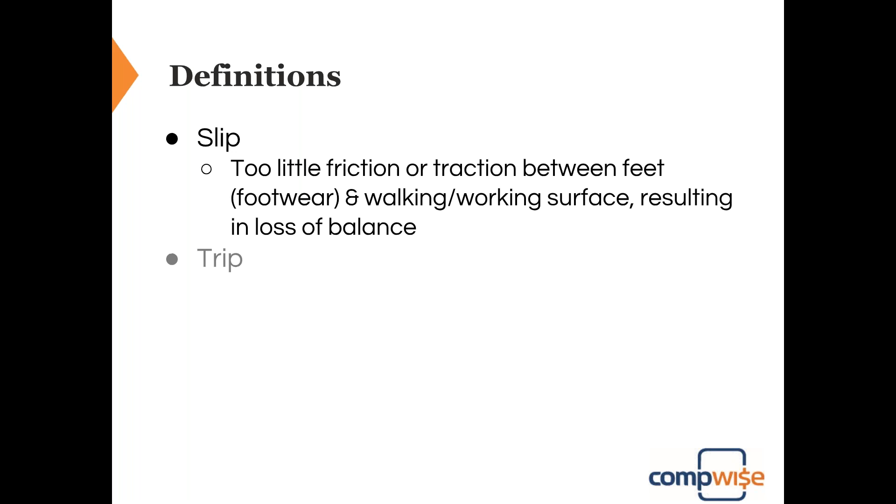I want to start off with a couple definitions. So how exactly do we define a slip? That is going to be when there's too little friction or traction between your footwear and the walking working surface that you're on, and then that results in a loss of balance, which leads to ultimately a fall, which ends up being the cause of a lot of injuries in the workplace. A trip is a little bit different. So instead of not having enough friction with a trip, you're going to hit an object or some sort of obstruction in the walkway, and then your upper body continues moving, and that ends up resulting in a loss of balance.

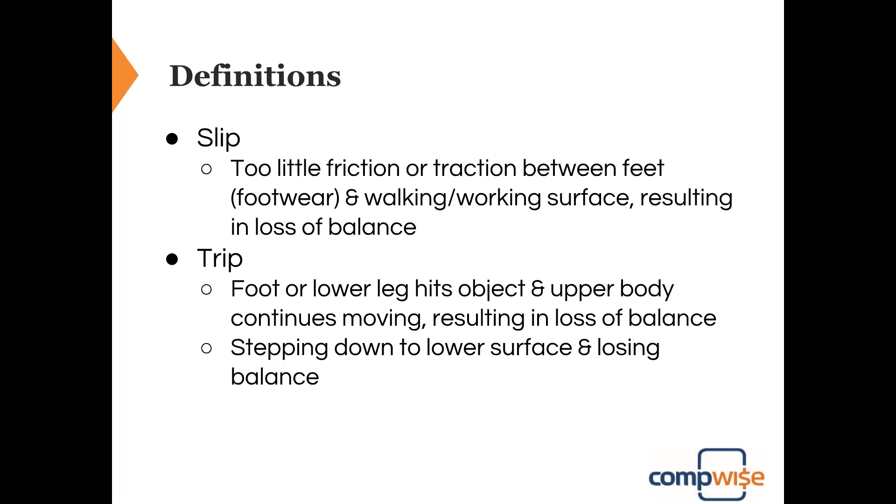All right, or you could trip by stepping down to a lower surface and losing your balance. I also want to put a little asterisk in there. You can do that actually as you're going up a surface too. As a kid, I was notorious for falling while going upstairs just because I went a little too quickly. So trips can also be falls that are while you're on a staircase as well, or stepping from a curb down to off the curb.

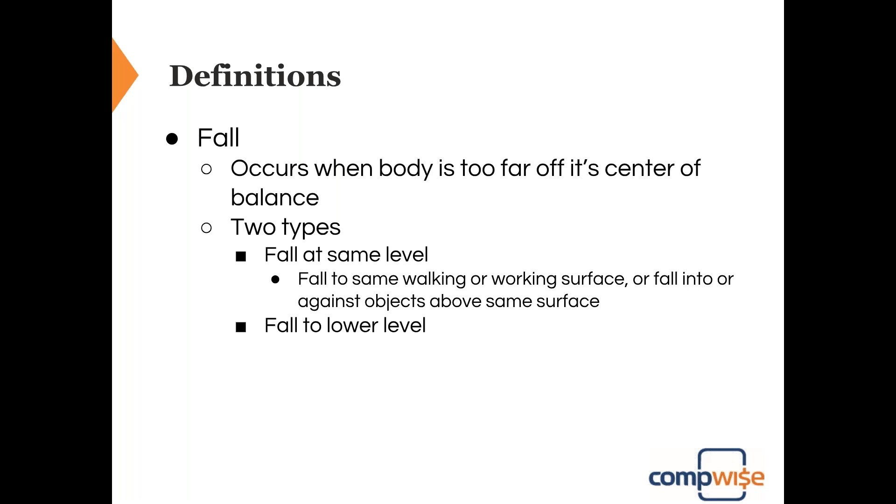Couple more definitions. The fall actually occurs when the body's too far off its center of balance, typically due to a slip or trip. And then there's 2 types of falls that we register. There are falls at the same level, which would be your slips and trips. And then there are falls to lower levels, which is when you're working on a ladder or you're up on a raised platform or a roof, and then you fall down to a lower level or working surface.

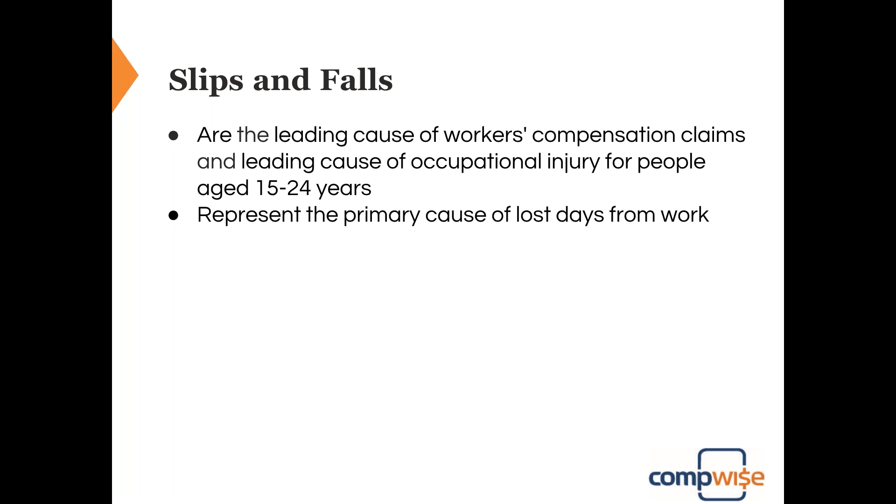Slips and falls are a leading cause of workers' compensation claims for people aged 15 to 24 years old. A lot of times these workers are less susceptible to overexertions, though they can have overexertions. But younger folks, the leading cause for occupational injury for them is slips and falls. And they are the primary cause of lost days from work as well. And that information is from the National Floor Safety Institute.

Slips, trips, and falls accounted for 26% of the total occupational injuries and illnesses in the United States in 2016. That was the last large survey that they put out data for so far, and makes them one of the leading causes of occupational injuries and illnesses in the entire country.

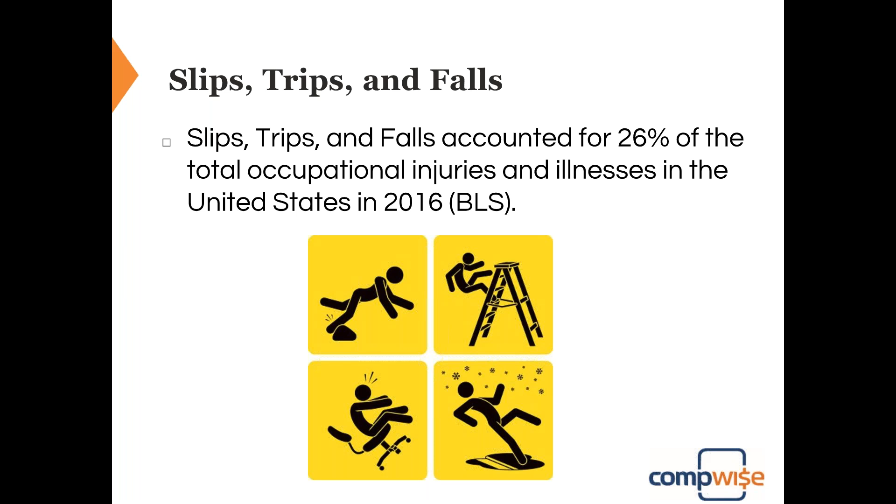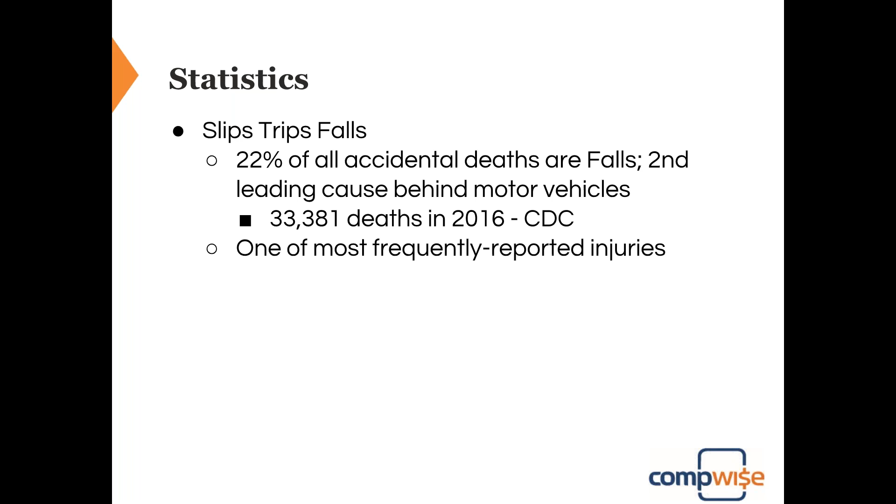Slips, trips, and falls are linked to 22% of all accidental deaths, which is the second leading cause behind motor vehicles, and that is both in and outside of the workplace. These numbers come from the CDC. In 2016, there were 33,381 deaths due to falls. And they're one of the most frequently reported injuries and make up about 25% of total reported claims per year in the country, and over 17% of all disabling injuries are a result of falls.

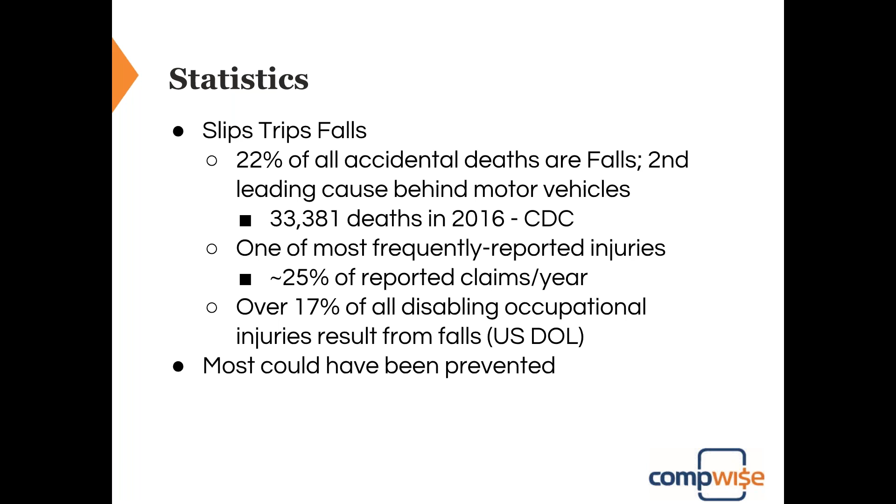And with falls and slips and trips, they are completely preventable in most cases. And later on in this presentation, we're going to talk about that prevention. As far as just in the workplace in 2016, 849 fatalities, which was 17% of all those fatalities. 229,000 cases with days away from work. So imagine the amount of money spent in lost time payments just due to slips, trips, and falls.

33% of slip fall incidents resulted in more than 31 days away from work, which is why we see such high claim values with falls. And then just in Washington, just looking at our group programs here in Washington, I pulled some of the numbers for those. And retail wholesale services, this is a 2-year period for you guys. So from October of 2016 to July of 2018, we saw 636 claims just in that Association of Washington Business, Retail, and Wholesale Services retro group.

That made up 31% of the total claims and incurred costs of over $12 million with an average cost of $20,000 per claim and almost 12,000 time lost days. That's just in a 2-year period, and that is just in the retail wholesale services group that AWB runs in Washington. Hospitality group, I know we have some folks from every group in this webinar. Hospitality group, I have a 4-year period available for you because you were one of the first groups that we started working with up here.

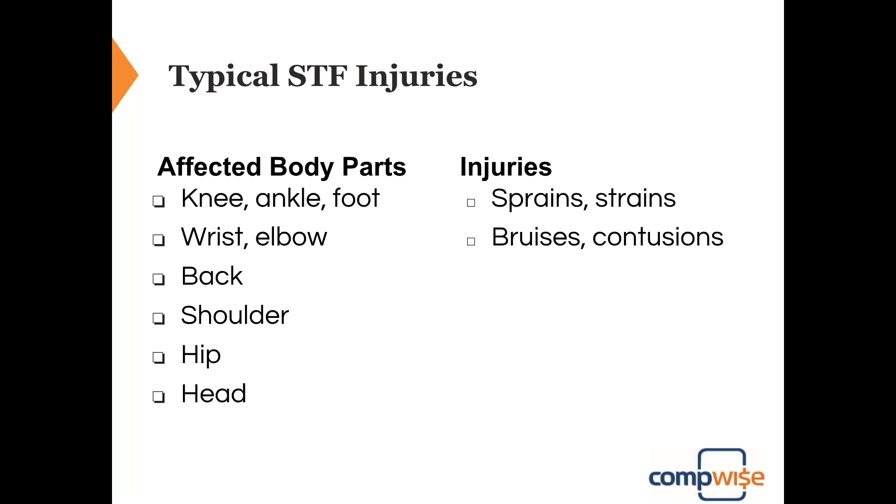The typical injuries we end up seeing then are sprains and strains, bruises and contusions in a best case scenario. Fractures are extremely common, especially in the arm. Abrasions and cuts, concussions and head trauma, which of course are going to be your most serious incidents. And then with back injuries, they're typically sprains and strains, though you can also see some skeletal injuries in a fall as well with the back.

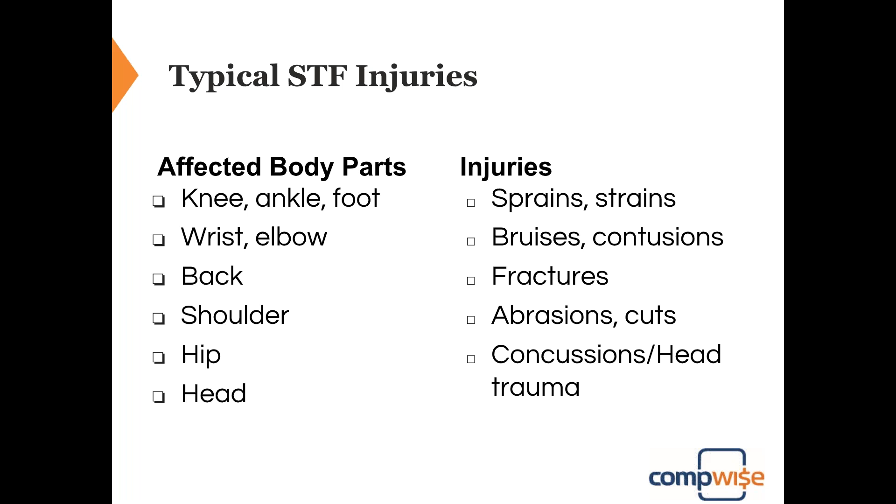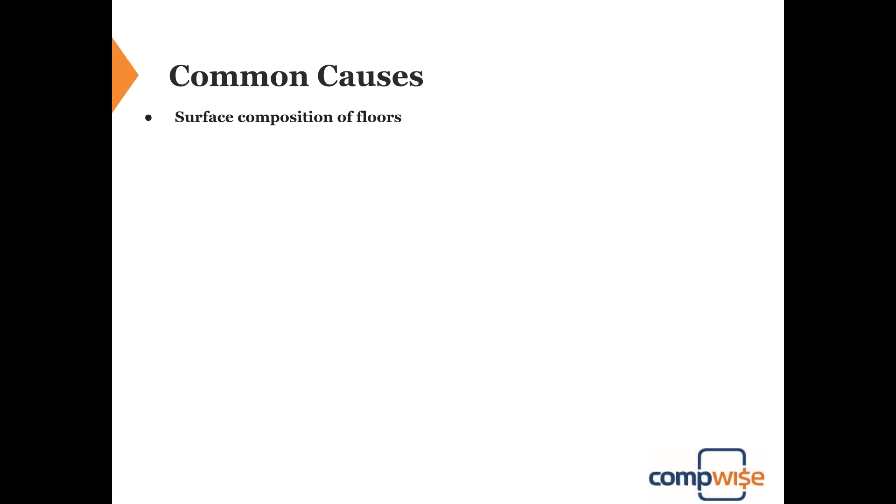The common causes of these slips and trips: the surface composition of the floor. So do you have a really smooth floor? Do you have wet, oily surfaces on that floor? Or is your floor typically dry and have a rough surface that provides good traction? So how much slip resistance does the floor have when it's dry and properly cleaned?

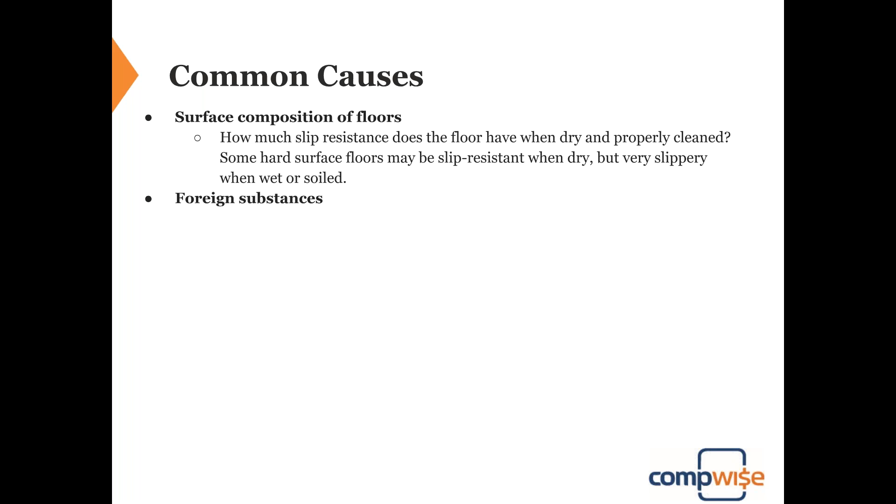Also some hard floor surfaces may be slip resistant when dry, but the moment you get it wet, it becomes extremely slippery. Some floor surfaces also get very slippery just when they get dust on them. So keep that in mind, the composition of your floors and the areas that you're working in. Any foreign substances, so ice, grease, and water, are major contributors to hazardous floors, and conventional mopping with the dirty mop water just makes the problem worse.

So consider some sort of no-touch cleaning system or a mop bucket that has separate compartments for clean and dirty water, because a lot of times the dirty water, especially if you're cleaning up a greasy area, once you start mixing that together with the grease and spreading it around, just makes things worse. So if you have a mop bucket that separates the dirty water from the clean water, that usually helps reduce things as well, especially those of you in the fast food industry working with those greasy floors a lot.

Surface conditions: do you have any raised or recessed edges, loose carpeting, mats that are rolled over in front of your entryways at the doors? Soiling and overall cleanliness of the floor can all be factors that increase slips. And then surface changes. For example, walking from a carpeted floor to a tile floor can cause someone to trip as well, especially if they can't really see the change. Or if you have a change in the level of your surface where you're stepping down onto another surface.

There are a lot of restaurants I've been to where you go into the restroom and you have to step up to get into the restroom. And then on the way back out, you're going into kind of a poorly lit area. There's a step down and you forget about it and you don't see it. It's not very apparent. And you step down and end up tripping or falling forwards into the wall in front of you. All right.

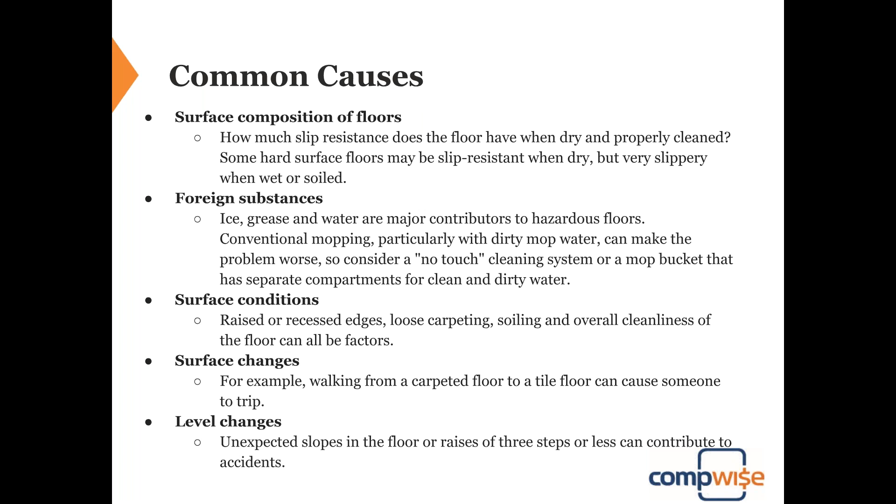Some more common causes: obstructions, especially extension cords and hoses, or even wet floor signs can make for an unsafe obstacle course. You've got to realize, especially if you have customers that come into your workplace, putting up a wet floor sign nowadays actually creates an additional hazard compared to just making sure that floor is dried right away.

How many times do you see people walking around not even looking up because their face is in their cell phone? This should not be a problem with employees because they shouldn't be on their phones, especially when they're walking around. But you can't really police that with customers. They'll walk in with their face in their phone and walk right into a wet floor sign, and that'll cause them to trip. And next thing you know, you have a civil suit on your hands.

I am guilty of this. I remember when I was a sophomore in college, walking down Prospect Street in Morgantown, West Virginia, playing Words with Friends on my phone. I ran face first into a telephone pole. Ever since then, I keep my phone in my pocket when I'm walking around, and if I need to use my phone, I stop and use it, because I did that in front of a couple people and was embarrassed for quite a while.

So again, watch out for creating additional hazards by putting wet floor signs down. Extension cords: if you're running extension cords, especially for more than just a really short time period, you should be taping those down or putting something over top of them to make them less of a trip hazard.

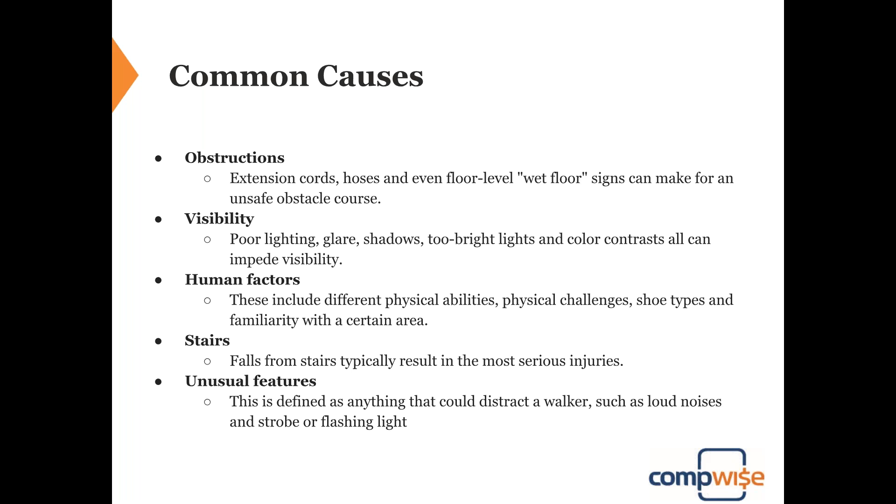Unusual features, anything that could distract a walker, such as loud noises, strobe lights, or flashing lights, could also cause a slip, trip, and fall. These are less common, and I see these more in construction sites than anywhere. You have a strobe from a piece of equipment that's going by that has someone rubbernecking, turning their head to look that direction and not looking at where they're walking. But typically that's on the lower end of common causes.

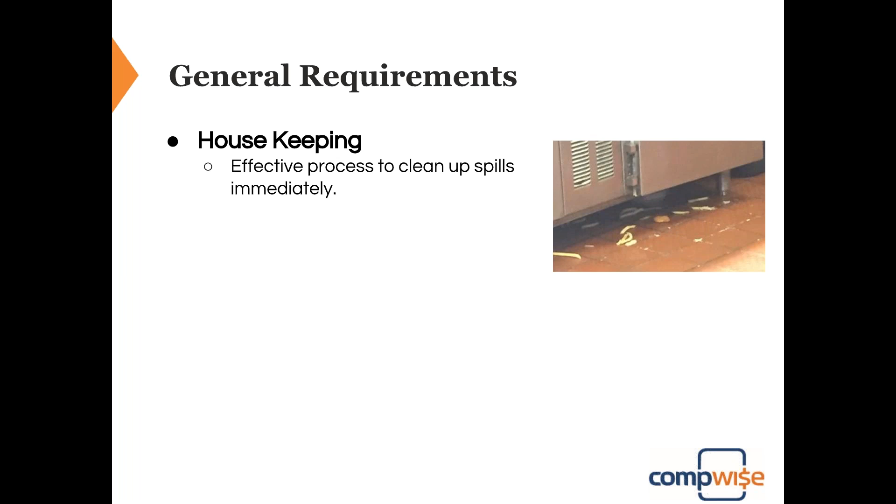Some general regulatory requirements for housekeeping. You need to have an effective process to clean up spills immediately that's relevant to your workplace, and an effective process to mitigate leaks or other causes of slippery floors or walkways.

I was actually just at the Phoenix airport yesterday, and after I landed, when I was walking through the terminal, it was raining out, which is rare in Phoenix, so they must not have known that their roof was not done very well on this brand new terminal. They had a huge leak coming in, and they pushed garbage cans and giant totes for moving garbage around under these leaks, and they were actually filling up and overflowing, because when it does rain in Phoenix, it rains hard. It was all over the carpeting, it was spilling out onto the tiled area, and they just could not keep up with it. So make sure you have an effective process to mitigate those leaks or other causes of slippery floors or walkways.

Construction areas, aisles, stairs, ramps, runways, corridors, offices, shops, and storage areas where work is in progress do need to be well lit. That is actually the exact wording from the WAC standard that housekeeping is located in. So make sure your lighting's good. That tends to be more of a problem in restaurants and construction sites than it does in most other general industry settings. Make sure the floor is free of debris.

You see this picture I have up here. That is a picture from obviously a fast food restaurant, one that I actually used to work at. And this is a common occurrence. You get into the busy part of the day, you start dropping some products on the floor and they get left there.

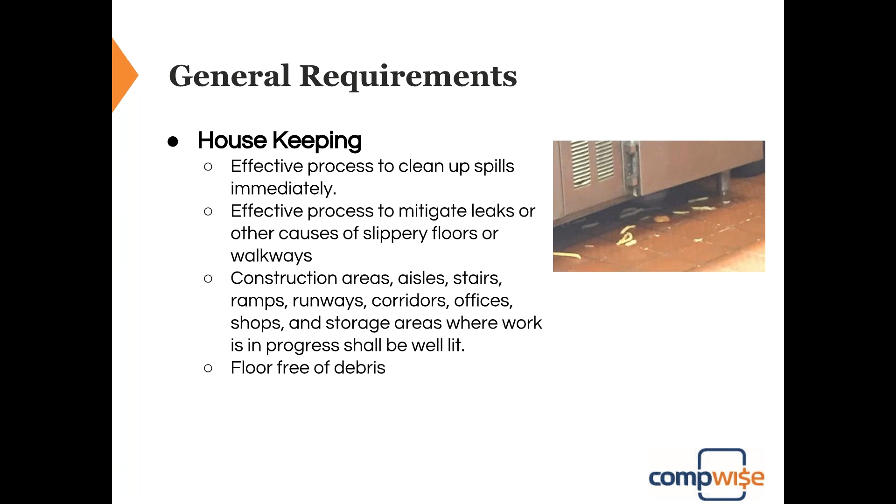It's always good to have one person that's assigned to be cleaning that stuff up as it happens, and staying ahead of it, because there is nothing more slippery than a French fry on one of those floors once you step on it and the grease comes out of it and gets on the floor. Even if you have a slip-resistant shoe, that French fry is going to wipe you out.

Aisles, passageways, and travel lanes. Make sure you keep a clear area and move any obstructions that could create a hazard. This is a perfect example of an extension cord that's in the way and could create a trip hazard. Make sure that in general industry settings you're marking permanent aisles and passageways that are made for pedestrians to move around, especially those of you in warehouses and really industrial settings.

Your aisles need to be wide enough so that any mechanical handling equipment that you're using can pass through it. Otherwise, if you have pallet jacks and things like that that are used to move heavy objects, and you have an area that's not wide enough for those to get into, employees can't use it, and then they're going to end up going in there, tripping over things, and you're going to have your overexertion injuries because they're not able to get in there with the mechanical handling equipment, so they're going to try to lift it on their own.

When you try to lift something that's too heavy, it could throw you off balance. You could fall. If you're getting it off a shelf, it could fall onto you, as well as, like I said, the overexertion injuries that could come along with that.

Making sure that you maintain 3 points of contact is also very important anytime you're climbing onto equipment or climbing a ladder. That 3 points of contact, I can't tell you how many times people will know that they need to have 3 points of contact, but it's such a mental task to actually do that when you're climbing a ladder. Next time you're on a ladder, try and catch yourself.

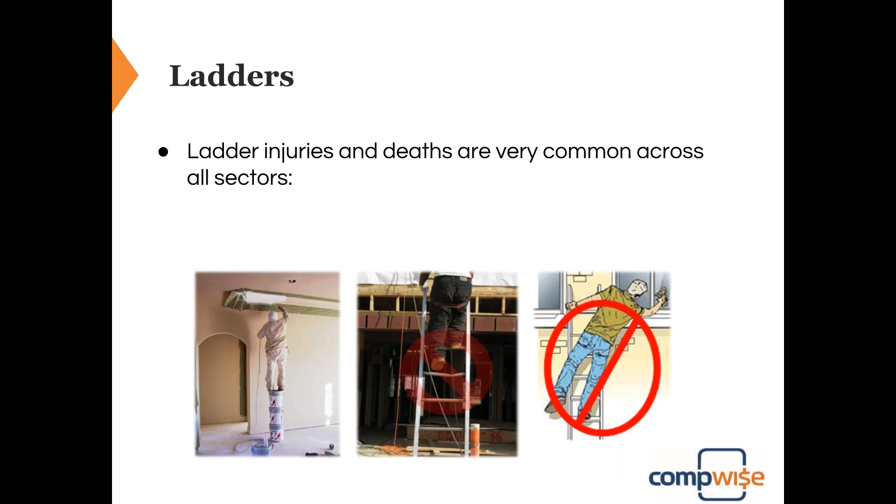There we go. So while you're on ladders, ladder injuries and deaths are very common across all sectors, and most of the time the incident is due to user error, not a defective ladder. Most employers are very good at making sure they take out defective ladders, which is great, and that is one reason that human error is a more common cause of those injuries than defective ladders are. This first picture on the left side of your screen here, make sure you're using a ladder whenever a ladder is needed.

I'm actually kind of impressed that that guy was able to get up on top of 3 buckets, but you should definitely not be doing that. It'd be really easy to lose your balance and fall off of that. The second image there, you can see a defective ladder rung, which, like I said, is not a common cause of injuries, because most of the time those ladders are taken out of service the moment they're damaged.

And then the last photo there, that is a perfect example of how people end up losing their balance and falling off the ladder. Even if he still had both feet on that ladder, with his chest outside of the rails, he's already off balance and could easily fall off that ladder.

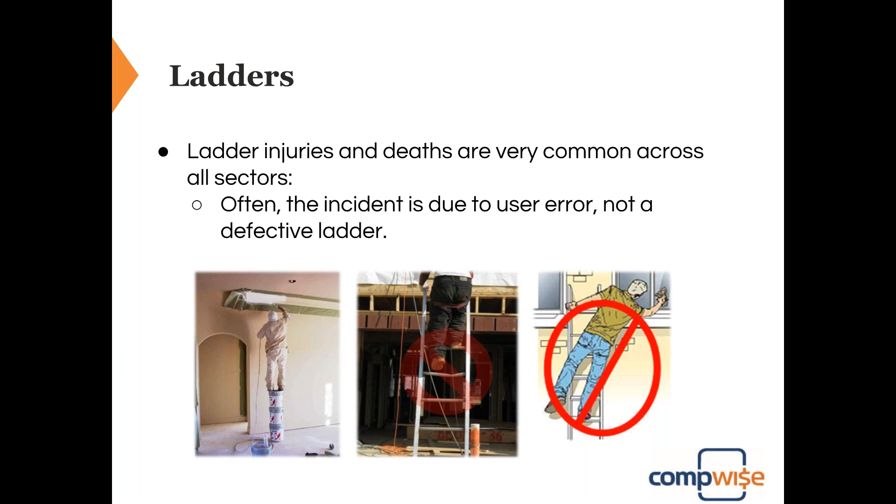Work platforms are always much safer than ladders. When you're able to use a work platform instead of a ladder, please do it. Ladders should really be a last resort. They're one of the most dangerous tools that people have on a job site, and a lot of people just don't give ladders the respect that they need because of the hazard that they pose.

Users on a ladder need to be trained how to properly use a ladder. This is a huge shortcoming in the retail industry, especially. A lot of times in the retail industry, we see folks that are going out to hang up seasonal decorations in a department store or something like that. And when they're hanging up those decorations or signs or even changing a light bulb, a lot of times it's a young employee who has not been trained to actually use the ladder. It's just assumed that they know how to use a ladder.

Never, ever assume or even believe someone when you ask them if they know how to use a ladder. Because if they tell you yes, it probably just means they know how to open it up. It doesn't mean that they know to use 3 points of contact to keep their chest between the rails and everything else that I've talked about so far.

Also, they should have someone holding the bottom of that ladder in the retail industry to make sure they're not falling, because when you fall in the retail industry, you're not even falling onto the floor most of the time. A lot of times you're falling onto a shelf full of products and then to the floor, which could pose even more of a hazard.

There is a great video if you want to use it for training purposes for this. It's made by either Prevent It Canada or WorkSafe BC, one of the two. But it's open source, available on YouTube. It's designed specifically for the retail industry, but I use it when I teach fall protection classes in every industry.

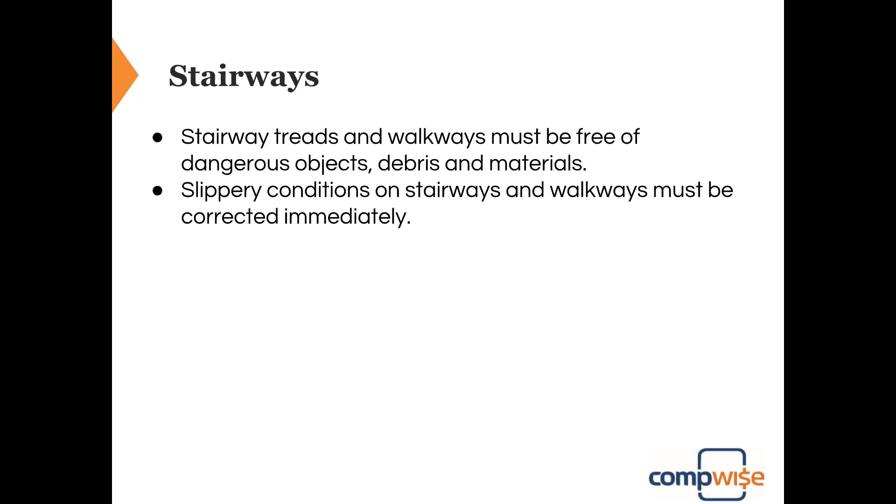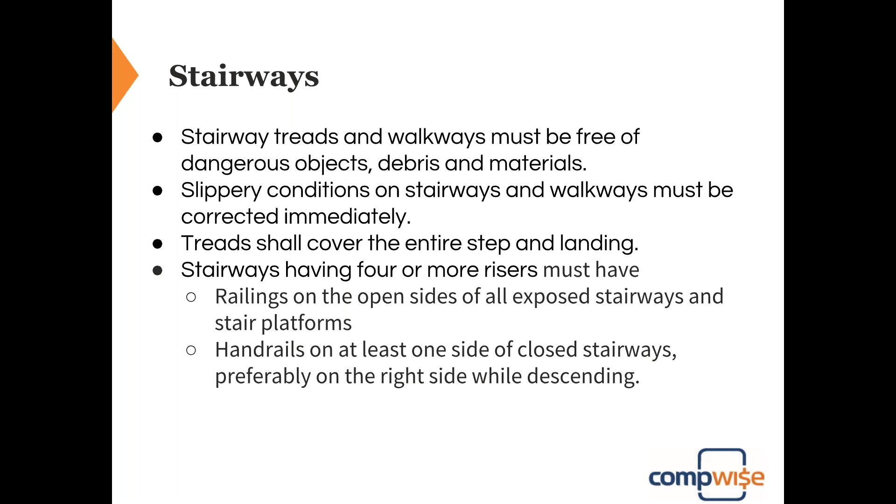Treads need to cover the entire step and landing. Again, these are right from the Washington codes for stairways. Stairways having 4 or more risers need to have railings on the open sides of all exposed stairways and stair platforms, and handrails on at least one side of closed stairways. Preferably, those should be on the right side of the body when you're descending. And it's never a bad idea to have a handrail on both sides either.

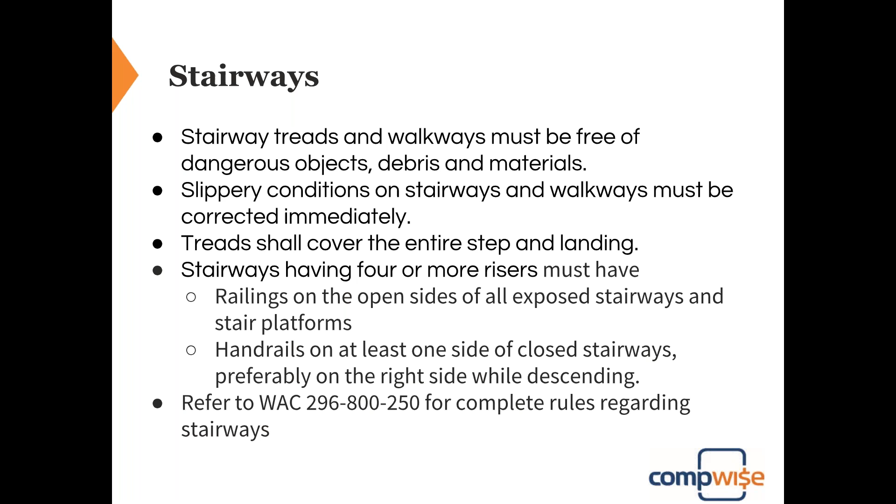If you want more information on the requirements for stairways, those are in WAC code 296-800-250. If you just Google WAC and then those numbers, it'll pop right up in a Google search. Also, those are all located on L&I's website.

Fall protection. Fall protection I teach globally at a high level. Each year, falls consistently make the top 3 causes for workplace fatalities. A number of factors are often involved in falls, including unstable work surfaces, misuse or failure to use fall protection equipment, and human error. And almost every time there is human error involved.

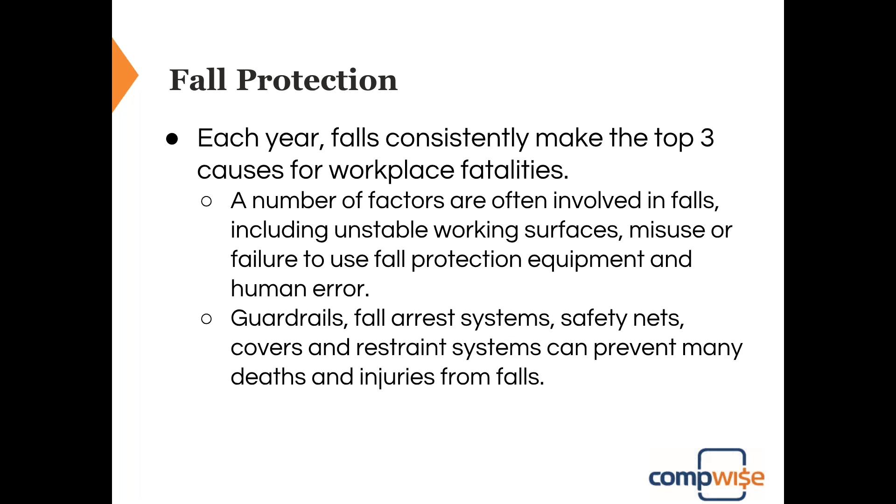Guardrails, fall arrest systems, safety nets, hole covers, and restraint systems are all things that can prevent many of these deaths and injuries from falls. Consider using aerial lifts or elevated work platforms to provide a safer elevated working surface. Also, commonly named a Baker scaffold or a rolling platform that has casters that lock on it. Those are highly preferable to using a ladder, especially ones that have guardrails on them if you're using the rolling scaffold.

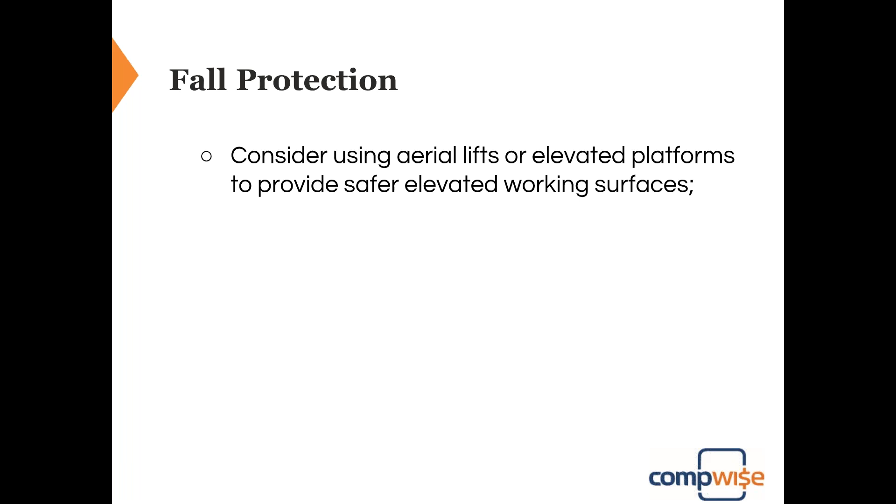Make sure that any guardrail systems you're erecting, that you put toe boards on it. Anytime you have warning lines on a roof or restraint line systems near the edges of floors and roofs. With the warning line systems, those can only be used by general industry if you're doing temporary work on a roof. And how far those warning lines have to be from the edge depends on the type of work you're doing. If you're doing an actual roof repair, they need to only be 6 feet away, but anything else in general industry, say you're going up to do maintenance on an AC unit, those warning lines then have to be at least 15 feet away from the edge.

A warning line, for those of you that aren't familiar with it, is not a standard guardrail. So a guardrail has to hold 200 pounds in the outward and downward direction and needs to be 42 inches plus or minus 3 off the ground, as well as having a mid-rail. With the warning lines, those are typically just a flagged set of rope that's just there to warn folks of an edge hazard and won't actually stop them from going through it.

If you need more information on that, feel free to send me an email and I can get you more information on warning line systems. Again, those are only for maintenance type work, and you have to be a good distance away from the edge to use warning lines.

Make sure any floor holes you have are covered. One of the biggest oversights on this is if you have any skylights on your roof and you're going to have anyone working on the roof, whether that's a maintenance worker going up to do work on an AC unit, or you have roofers up there replacing your roof, every single one of those skylights needs to be either guardrailed, protected with a cage over top that people can't fall through, or otherwise covered up with something that can't be fallen through when someone's working up there.

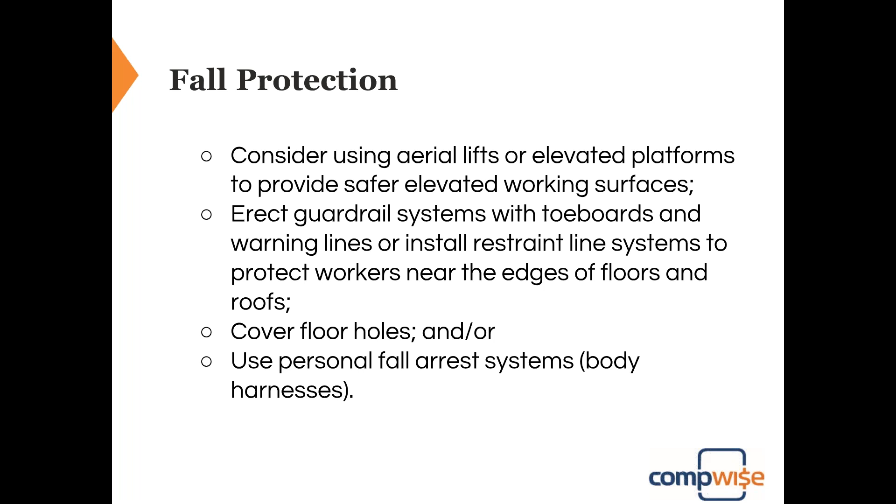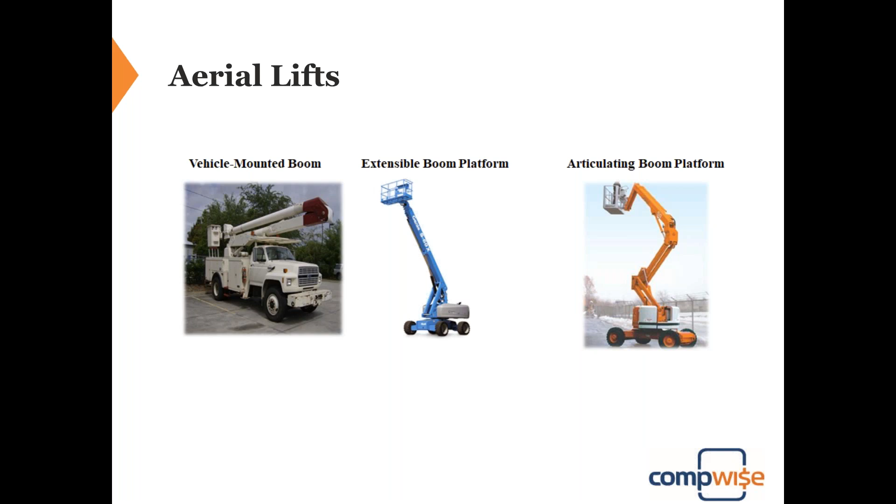Speaking of scissor lifts and boom lifts, aerial lifts have some unique requirements. When I say aerial lift, I'm talking about extensible booms, articulating booms, and vehicle mounted booms. I am not talking about scissor lifts right now in this next slide. Aerial lifts do require fall protection.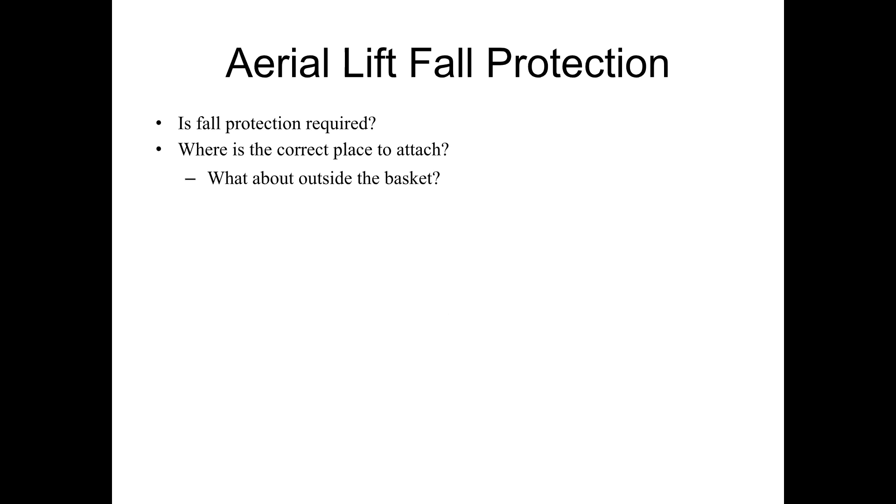Basket guardrails, you cannot tie off to a guardrail. The reason is those guardrails are only designed to hold 200 pounds, and they're not designed to hold 5,000 pounds, which is what OSHA and WISHA require for you to tie off to, a 5,000 pound anchorage point.

Connector options hierarchy: this is where I mentioned that regular lanyards do not work in most situations, because you need at least 18 feet of clearance from your anchorage point with a regular lanyard. Your best option is a PFL. PFLs, also known as personal fall limiters, are small devices that act like a seat belt. When you start to fall, they lock off just like a seat belt would, and they also have an energy absorber inside so that if you build up too much force, it will reduce it to a level that your body can handle without being significantly injured.

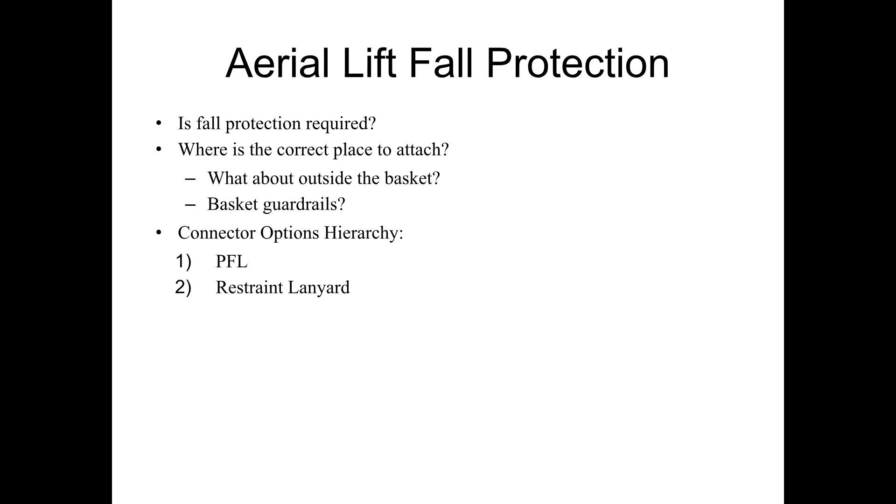Your second best option is a restraint lanyard. Again, with these boom lifts, you are at risk of being catapulted out. So a regular lanyard, which is kind of the last resort for use in these: with a regular lanyard, you are going to start to fly up into the air. It will start to partially deploy on the way up. You're going to go over the guardrails and come back down on the outside. And when that's fully deployed, you're going to have 6 feet of the original lanyard length plus 4 feet of shock absorber, which brings you to 10 feet, plus approximately 6 feet for the worker's height, which brings you to 16 feet of distance.

In most aerial lifts, when you fall out of them, it's when you are driving them and you hit a bump and it catapults you out. So usually you have that at a low level while you're moving as well. And so when you get catapulted out, you're going to be touching the ground at this point. And if you're not touching the ground with that energy absorbing lanyard with that much distance deployed, when you come back down on the downswing, you're going to swing back and be almost at head level with the bottom of that lift platform, which could result in head injuries or, more commonly, internal decapitation, where it will break your neck. And we do see fatalities due to that.

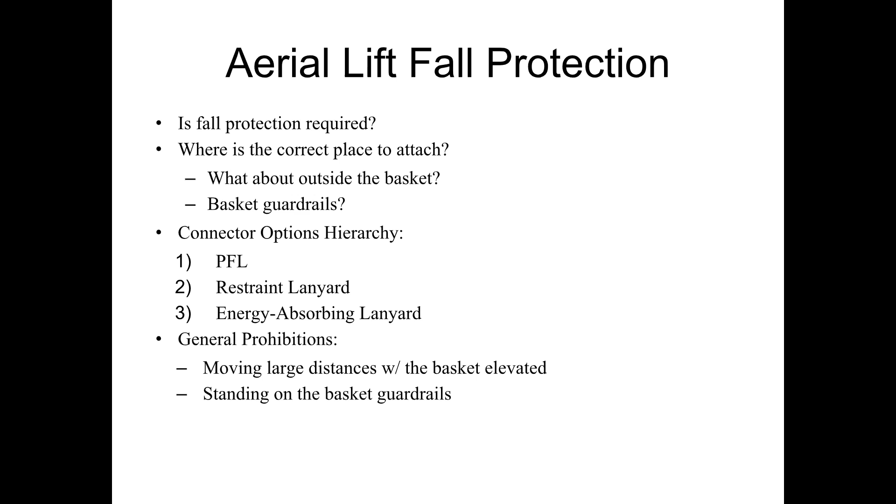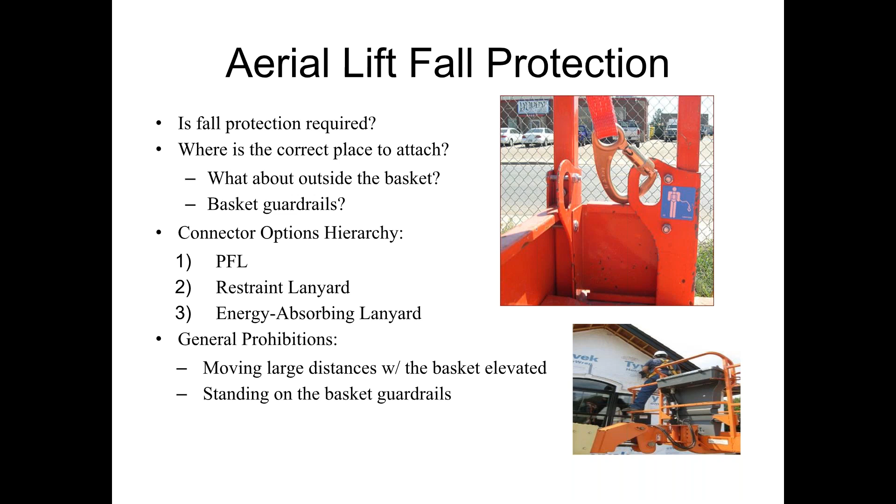When you're using a PFL, on the next slide, I'll explain the benefits of that and go through the math with you. General prohibitions: you never move large distances with the basket elevated, and you never stand on the guardrails of these baskets like you see in this second picture here. You see someone standing on the guardrails. That first picture is the designated manufacturer's attachment point on that particular lift, which the manufacturer rates for at least 3,600 pounds, since it's designed by an engineer. If engineers don't design an anchorage point, then it has to hold at least 5,000 pounds. And that's just to add an additional safety factor since you're eyeballing it as a competent person.

Okay. The mistakes people make in an aerial lift: I mentioned a typical lanyard requires 18+ feet of fall clearance. With a PFL, a personal fall limiter, they're round devices that essentially act like a seat belt. A Class A PFL is going to lock off and fully deploy in under 24 inches, and then we add a 2-foot safety factor to that. So you're going to have a total fall distance of essentially 4 feet. A Class B SRL is going to lock off fully in 54 inches, and then we add a 2-foot safety factor to that, so it comes to a total of 6.5 feet of fall distance with that one, which is much less than the 16 feet plus 2 feet needed for a traditional lanyard.

Okay. I'm going to just take a moment here to see if there were any questions before I keep going. So, looks like we don't have any questions in the question box, so that's good. All right, so I'm going to keep going here.

With scissor lifts, is fall protection required in a scissor lift? You should have access to the chat box down in the bottom right. I want to know what you think. Is fall protection required by OSHA, WISHA, or L&I in a scissor lift? If anyone's brave enough to go ahead in there... All right, looks like nobody wants to take a stab at this one in the chat box.

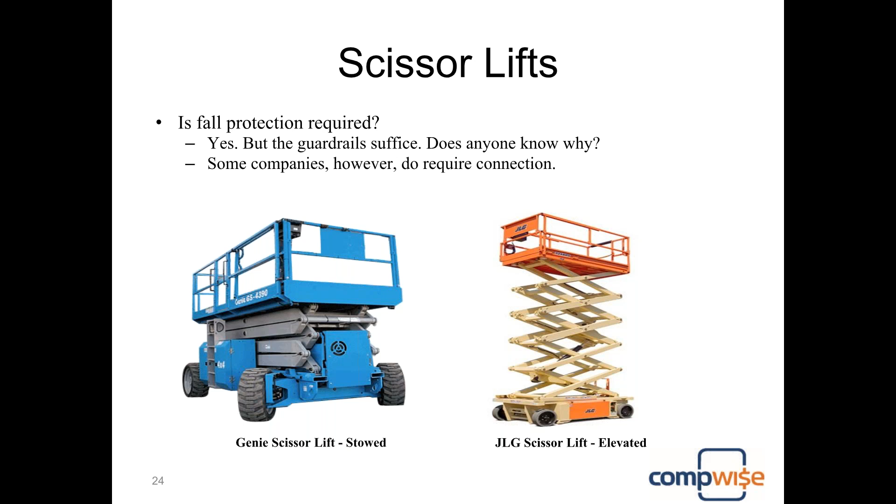And that is because most of the fatalities involving scissor lifts are falls due to human error, where the worker will lean outside or lean their chest over the guardrails or stand on the guardrails and they end up falling out. If they had a PFL or a lanyard on, it would have prevented that fatality or that injury. So I recommend that you have a company policy that requires fall arrest even on a scissor lift. Okay, and there's images for a scissor lift for those of you that may not be familiar with those.

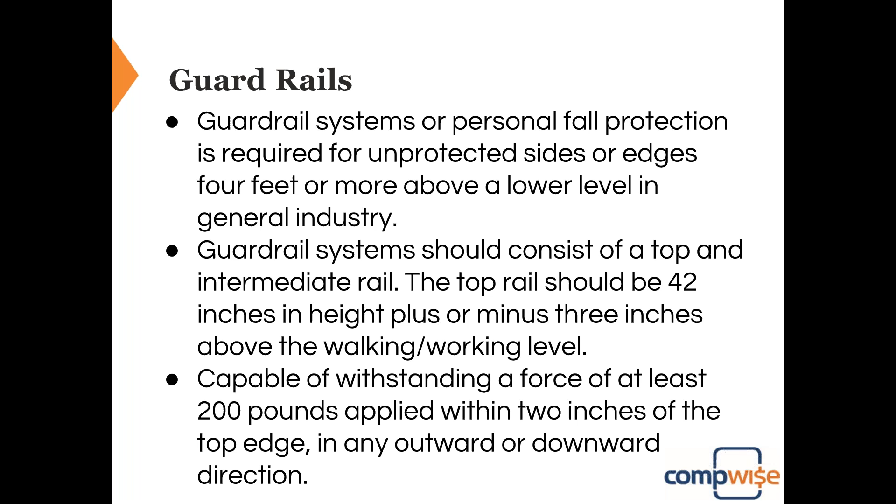So guardrail systems are required in the state of Washington for unprotected edges that are 4 feet or more above a lower level in general industry. Okay, so anytime you have a platform that's more than 4 feet above the lower level, you need to have a guardrail system. The top rail should be 42 inches in height, plus or minus 3 inches. They give you that leeway mostly in case you decide to use wire rope or cable as a guardrail, to account for the deflection that might be in that. They also need to be capable of withstanding a force, as I said earlier, of 200 pounds in the outward and downward direction.

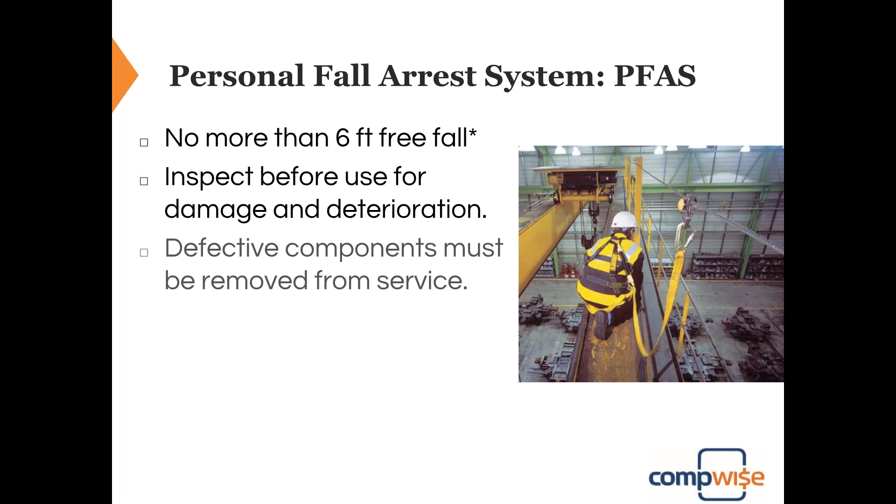With the personal fall arrest systems, most lanyards do not allow more than 6 feet of free fall. That means you need to anchor it at the D-ring level of the harness or higher, except when you are in a lift. Most have exemptions for when you're in a lift. You can anchor them lower. That being said, you can buy special equipment. It's called a black label lanyard that you can anchor at foot level if that's needed for you, but you also need more clearance with those. Make sure any fall arrest equipment you're using, you inspect for damage or deterioration prior to use. Anything that is damaged needs to be removed from use right away.

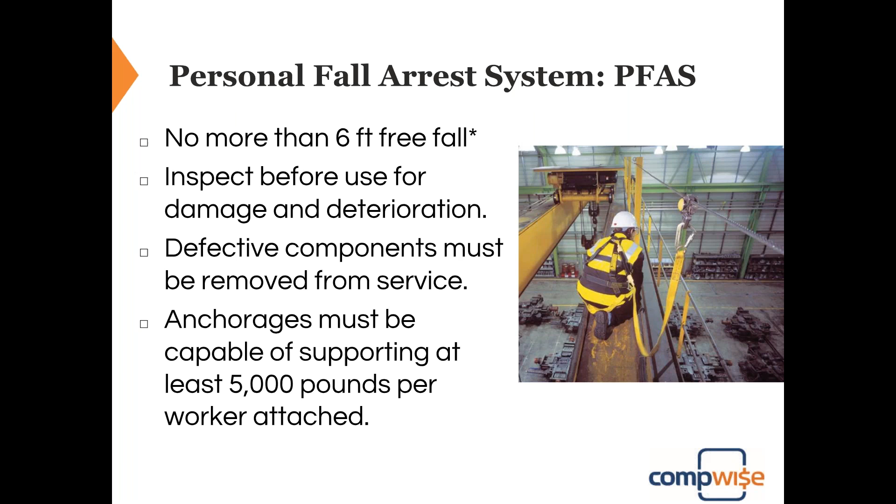And all anchorage points in general industry need to be capable of supporting at least 5,000 pounds per worker, no matter what, whether it's a restraint style setup or a fall arrest style setup or for positioning. That rule just changed in 2017. There used to be lower anchorage requirements for other types of anchorage points. That being said, there is one exception here. If you hire an engineer, which is termed as a qualified person under the regulations, to come in, they can certify something for a lower number, which is 3,600 pounds, but that has to be done by an engineer, stamped and also in writing.

All right, coming back more away from the fall arrest and back into the slips and trips. Watch out for ice. I mentioned this earlier. Ice is one of the leading causes, especially in Washington, especially this time of year, of your slips and trips. Make sure you're filling in and patching cracks and holes, especially in your parking lots, because if your employee is injured in the parking lot coming into work, a lot of times that ends up getting covered under workers' comp as well as OSHA recordability.

Repairing and eliminating raised areas due to tree roots, settling, cold weather, and ordinary wear and tear. So keep an eye on your sidewalks and your work surfaces and your parking lots for any type of damage. Make sure you reduce surface water by directing your roof drainage away from the sidewalks and parking areas, especially in the winter. If that water starts to pool up when it's above freezing and then freezes over, you just have nothing but an ice skating rink right outside your front doors.